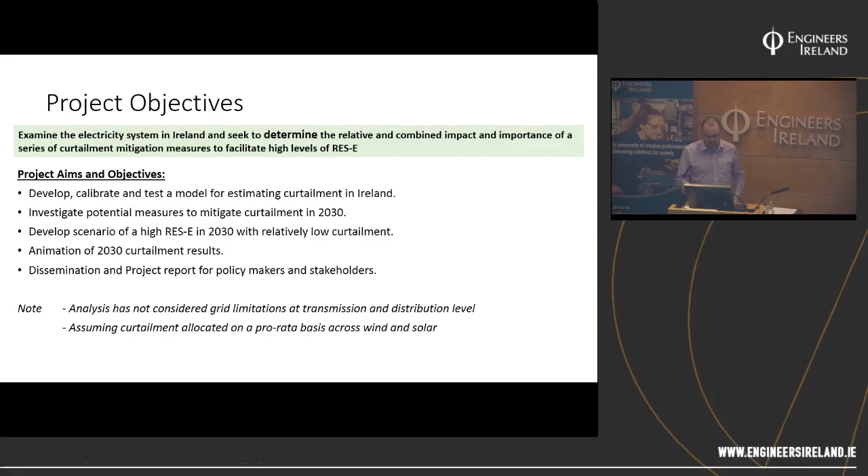And another point is that we are modeling curtailment here on a pro rata basis, which basically means that when there's a surplus of renewables on the system that the system can't take, we're allocating that burden equally among the generators. There is something in the clean energy package that needs to be looked at the moment around priority dispatch and the loss of priority dispatch for new generators. And with what I would say would be the wrong interpretation of that, or at least not a very helpful one, there would be a risk that the burden of curtailment could all be put on new generators, and that could have a material impact on what we're trying to do here. So just to call out those two assumptions before we get into it.

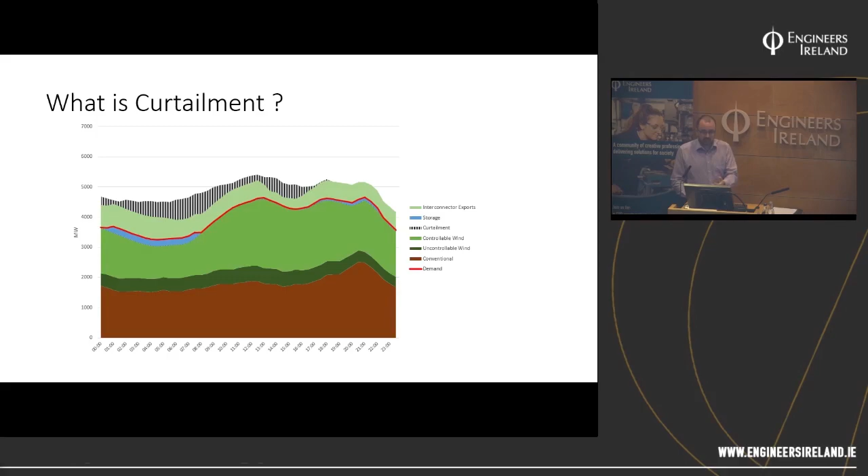So what we've done for this study is we're taking what's actually a very complex series of operational constraints that EirGrid have to employ when they're dispatching the power system, and we simplify it down to a parameter called minimum generation. And so if you look at that graph, the minimum generation level there is roughly where it's at today. Now there's another parameter that I'm just going to come on to. So that's an aggregate of all the different operational constraints.

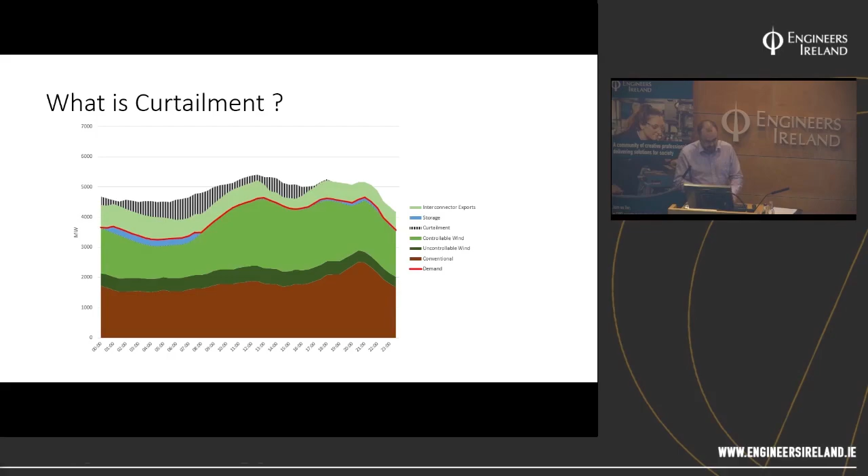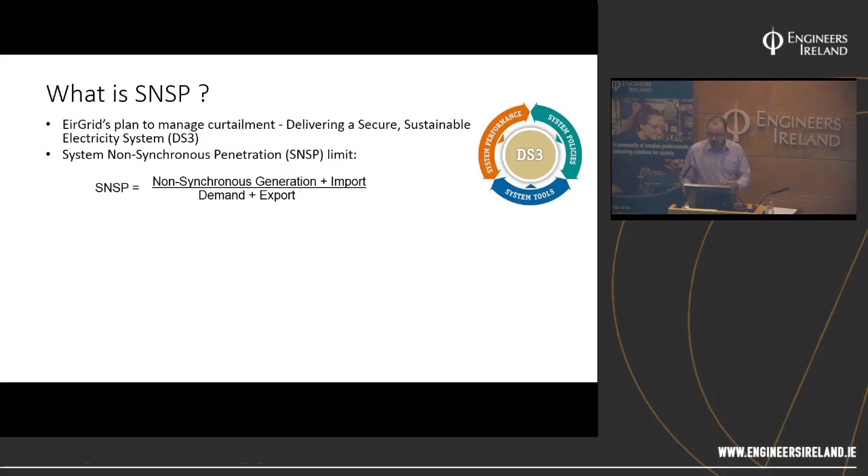When we talk about this issue, a parameter that comes up a lot that people may have heard of is the system non-synchronous penetration limit. So that's effectively non-synchronous generation plus interconnector imports divided by demand plus exports. And in real layman's terms, for our purposes in the Irish market, you can almost read that to be wind generation divided by demand and interconnector exports, because you tend not to be importing, or at least you shouldn't be importing at times when you have a lot of wind on the system. So that's a parameter that EirGrid has a constraint on.

So in the original facilitation of renewable studies that were done in advance of putting the DS3 program together, again, that people may be familiar with, they identified that the system could operate relatively safely at a 50% penetration level, but to go to 75%, they needed to do quite a bit of work to facilitate that level of penetration. And for a grid of our size and our reliability, that is world leading stuff. It's really cutting edge work that EirGrid have been doing on that.

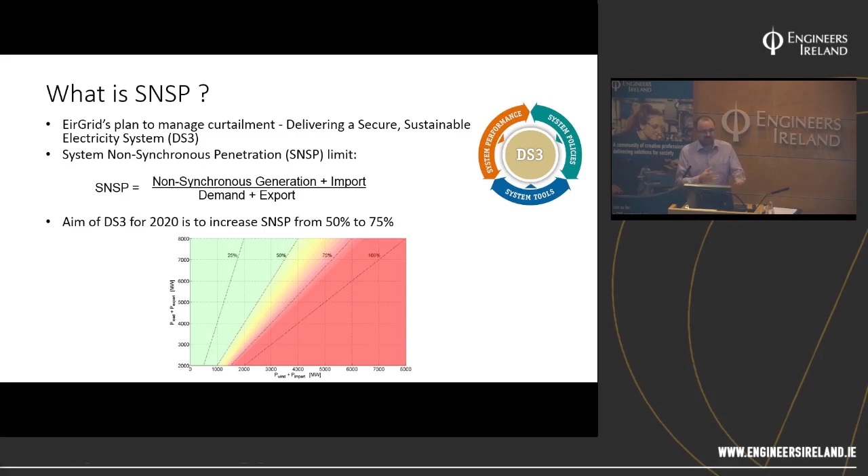And the DS3 program was effectively the program they put in place to allow the system to go from 50% penetration to 75% penetration by 2020. I think today we're at 65. I believe we might be trialing 70 by the end of the year. And as I say, even at that, that's already world leading stuff. And there's many countries around the world looking to the work EirGrid are doing to understand what's possible in this space. But what I would say is that is one operational constraint. There's a whole bunch of other ones. And when you aggregate them together, the end result is there's a big stack of conventional generation that's almost in the way of renewables, that you can't fit more renewables on the system.

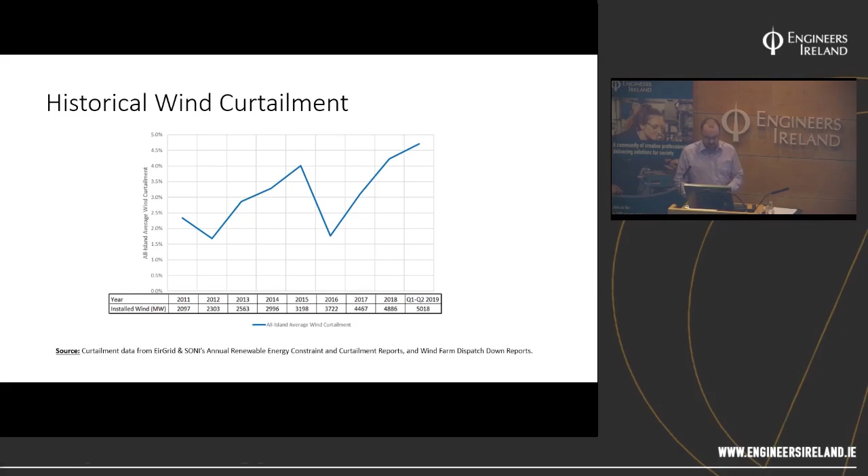But I would say again, if it wasn't for some of the really unbelievable work EirGrid have been doing in this space, if we were still at a 50% SNSP level and at the minimum generation levels that we would have had a number of years ago, that would be a lot higher. You could be looking at 10–15% of the power being wasted. So there's a lot of good stuff happening in that space. Industry will always want more, it's in our nature. But every now and again, you have to just acknowledge and take a step back and look at what they've been doing, and it's impressive stuff.

I'll just briefly cover the policy context because it is important. So if you think to how did we get to where we are today, and looking towards 2020, I suppose the Renewable Energy Directive in 2009 would have put a binding target on Ireland for renewable energy in total, and Ireland's response to that was to come up with this National Renewable Energy Action Plan.

Within that overall plan, it set individual targets for heat, transport, and electricity. But it was in that plan that the 40% target for renewable electricity emerged, and I think that was what gave the mandate to EirGrid, to ESB, to the regulators. It's that kind of policy target that gives all the other key stakeholders the mandate to do the work they need to do to get to these very, very high penetration levels.

The next generation, if you like, of that is the Clean Energy Package for all Europeans. So that's looking at an EU-wide target for renewable energy of 32%. And it's being worked a little differently in that the individual countries are being asked to come forward with how they can contribute to that target. So it's not a binding target on individual countries. And Ireland would have submitted its first draft of its NECP back in December 2018.

And I think in June this year, the European Union came back indicating that it wasn't ambitious enough. And I suppose since Minister Bruton has gotten into office, we've really seen a sea change, and the energy and ambition that he's brought to this issue has been fantastic for the industry, and what we're now seeing in the Climate Action Plan. And actually, with everything that's going on maybe in the UK, I think everyone loves criticising politicians.

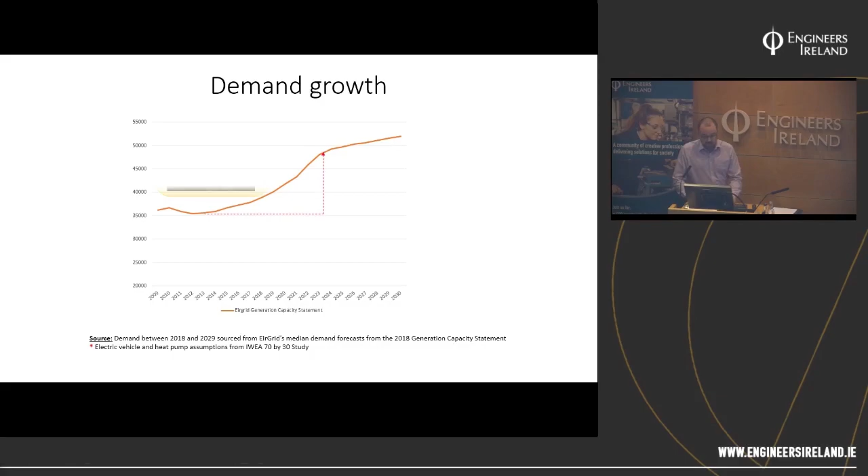Speak just briefly to demand growth. So this is the point I was making at the beginning, that the electricity sector is growing relatively rapidly, and it's primarily been driven by a huge growth in demand for data, particularly around Dublin. And so this graph here is looking from 2009, where demand has been, and looking at the EirGrid generation capacity statements and their demand forecasts out to 2030. And you are seeing this steep rise in demand up to 2025.

There's certainly a question mark as to what happens after 2025. I certainly don't think there's going to be less data. I think EirGrid are saying they can only forecast on what they can see. I think it's an open question. You do hear of technological developments in the data center sector in terms of the efficiency of the data centers, but there's certainly a question there as to will that growth actually really taper off at that level. I'll just leave that hang as an open question.

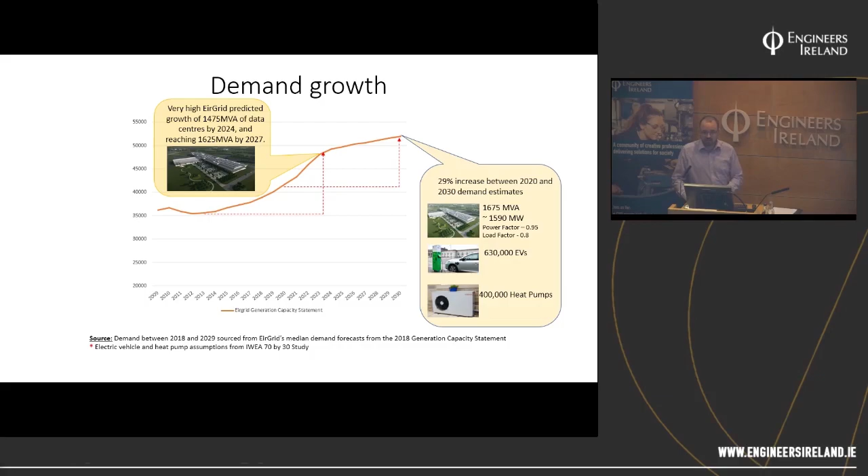And then obviously, we're seeing as part of the Climate Action Plan significant plans to increase electrification in the heat and transport sectors. But again, just to make the point, if you look at the actual numbers and where the growth is, I should say the figures we're using here for EVs and heat pumps, this study would have been carried out in advance of the Climate Action Plan, so they have grown a bit since this study was done. But even so, when you put them beside the data center demand, it's relatively modest in terms of its contribution.

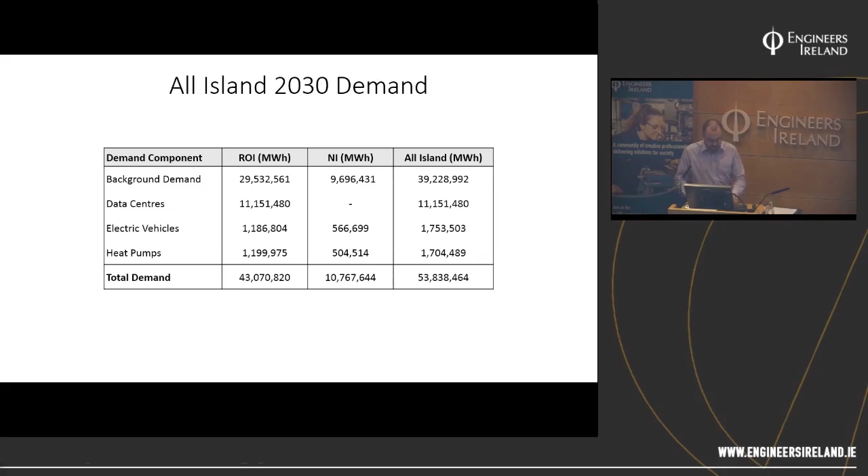Because we're looking at 2030 demand, with that higher demand figure, this is the all-island wind capacity that we expect to have installed. This is where RES-E would be with that higher demand. So we're taking 2030 demand, the 2020 system as a starting point. When I run this animation in a second, you'll see the wind capacity. We're just going to keep adding wind.

You'll see RES-E will keep going up, but you'll see this dial, which is effectively the percentage of all the available energy that gets wasted, rising as you keep adding wind and we're not doing anything else to mitigate the curtailment. So I'll just run that. And on the heat map, you'll see the different colors come up. In each individual hour, the darker the color, the more intense the curtailment is in that hour.

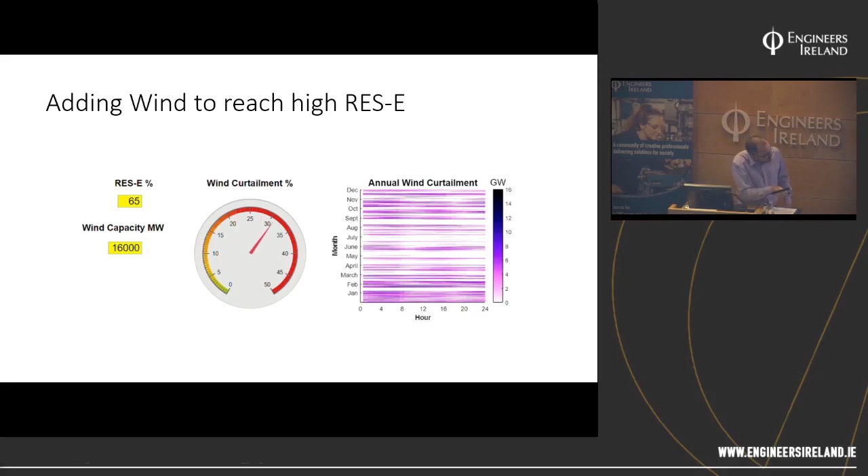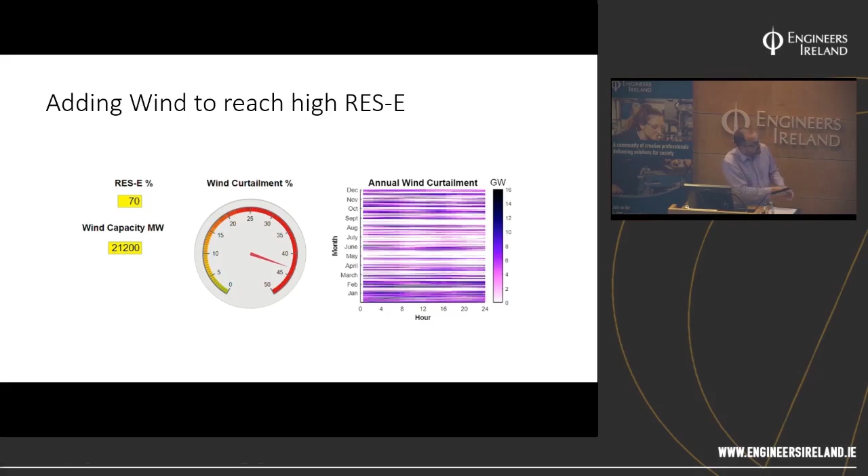As you run it on, you'll see that we can actually get to 70% RES-E just by adding wind, but it doesn't need too much explaining. Curtailment is getting close to 45%, and you can see that about 70-80% of the year there's some sort of curtailment happening. The events are very, very long duration. And that's a very important graph.

From an engineering perspective, I would call this defining the problem. There's huge amounts of energy there that you have to somehow manage. And when you think about the solutions that might actually help with that, just think about that. It's massive, massive amounts of energy that somehow need to be managed.

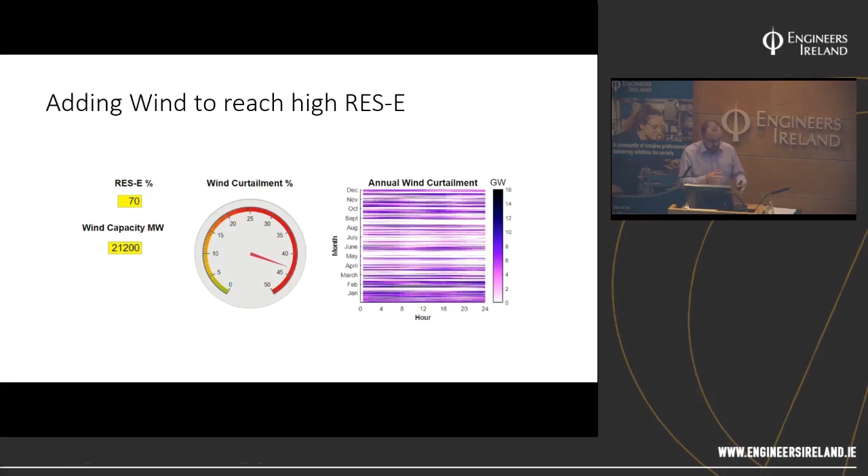So we did the same exercise with solar, just as a curiosity. We're starting here. I think there's about 300 megawatts of solar in Northern Ireland, and almost nothing in the Republic. This animation is a little bit slow, you'll have to bear with me. So we start adding solar, and we started from 35% RES-E, which was the 2020 wind. As we keep adding solar capacity, the RES-E starts going up.

But it's going up more slowly because solar in Ireland has a much lower capacity factor. So, you're adding an awful lot of solar to make a more modest contribution to the RES-E target, and that's purely capacity factor. And as you keep going, the nature of the solar curtailment problem is quite different. So it's not a long duration problem. It's an intensity problem. So because you're having to add so much capacity to knock a dent in the RES-E target, you end up with these very, very tall spikes of energy, and you still have these massive quantities of energy to try and move around or manage.

Now, just to test, is it even theoretically possible to get to 70%? And it's kind of obvious when you think about it that it isn't with solar, because you're only generating through a very limited number of hours in the day. So we went to silly figures with 50 gigawatts and you get to 56% RES-E. But curtailment kind of goes off the chart there. It's above 70%.

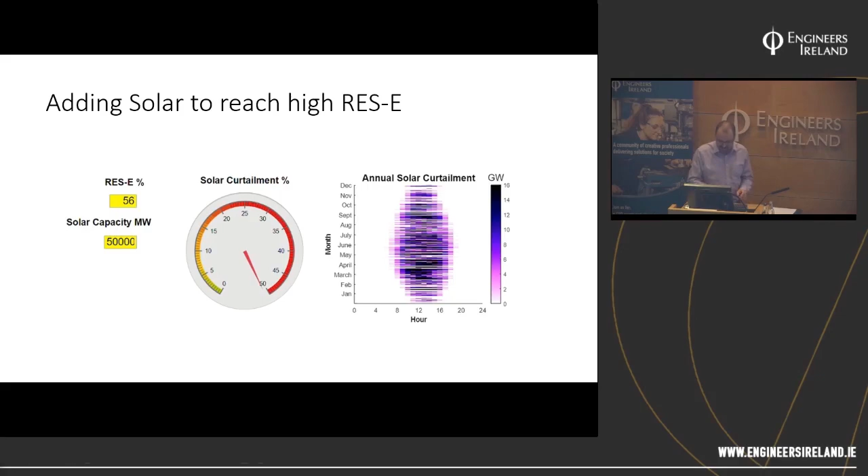Now, if there's any solar developers in the room, I do have some good stuff to say about solar later. So if the sniper rifles are out, you can put them back in the holster for a few minutes. I am going to say some good stuff later. Very good.

Okay, so that's defining the problem in terms of the curtailment challenge. So what we now look at is what are the different strategies that you can deploy to manage that curtailment and create space on the system for renewables. So we look at relieving these operational constraints. If you can find the technical solutions to these operational constraints to allow the system to run with much, much less conventional generation on it, how much space can you create? And then we look at interconnector capacity, storage technologies of different energy durations.

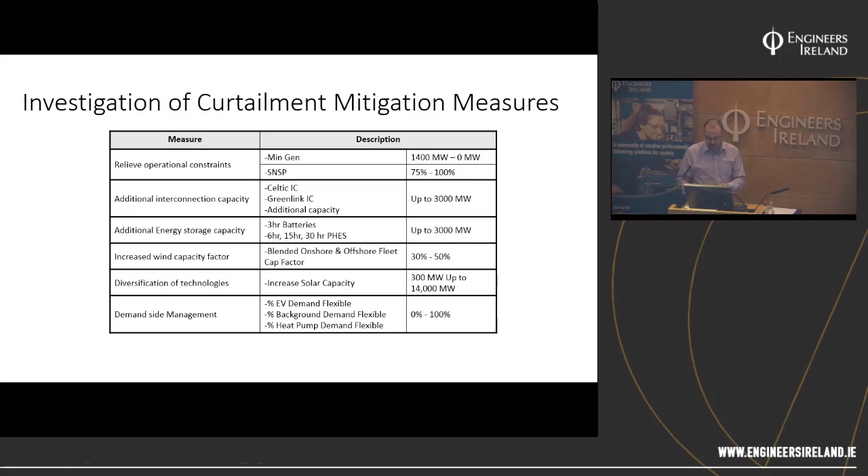A surprising one when we get to it was the wind capacity factor. So we looked at what's the impact of actually increasing the wind capacity factor, and that's effectively larger rotors without increasing the generators too much. I'll explain that in more detail in a minute, but it was quite a positive and surprising result we got on that. We then look at the diversification value of integrating a bit of solar into the mix, and we look at demand side management and what that can do.

So this is, if John O'Sullivan can see this, he'll probably shoot me, but this is the most unbelievably simplified version of the interactions between all the operational constraints and curtailment. The point we're trying to make here is there's a lot of focus on the SNSP, and this is something EirGrid would understand very well, there's a lot of focus on the instantaneous penetration of renewables on the system, but you hear less about the other operational constraints that cause conventional generation to run, or make it essential that that conventional generation runs.

So we first look at, and this is somewhat of a hypothetical exercise, because a lot of the things that you might do to facilitate a high SNSP limit by their nature would have the effect of reducing min-gen. So there is a complex engineering relationship between the solutions for SNSP and min-gen, but they're not directly linked. Some of the things that you would do to increase SNSP wouldn't necessarily get rid of the min-gen problem.

But you can see there, if you go to 100% SNSP as an individual constraint, there's a tiny improvement in curtailment. So we're starting here from this broken system with 45% of the energy being wasted, and we increase the SNSP limit to the point where that individual constraint is gone, but it doesn't do much while all the other constraints remain.

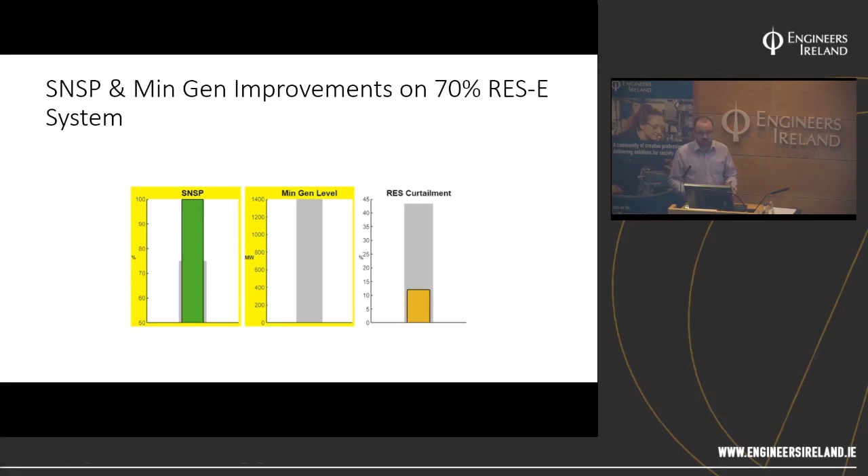And I think if you're at 100% SNSP, that's pointless if you're not fixing the other operational constraints and reducing the min-gen. So EirGrid are certainly thinking about getting somewhere, maybe not quite to here, but not very far away, and probably for 2040. This could be what you're looking at, a completely non-synchronous system.

Okay, so the next thing we looked at, again starting from the left-hand side of the graph with curtailment at 45%, the first technology we looked at was battery storage. Here we're looking at 3-hour batteries, so effectively they get full after 3 hours. And what you're finding is, because of that limited energy duration, when you have a curtailment event, the battery gets full very quickly, and once it's full, it sits there full for a very long time, waiting to find space to discharge before it can empty itself and be available to charge again.

So because of that energy limitation, what batteries can do for you on this kind of a system is not very much. And a bit like the solar, I have good stuff to say about batteries as well in a minute. So again, anyone who's developing batteries, please don't shoot me.

And then when you look to storage technologies that have greater energy capacity, so they don't get full as quick. If you take Turlough Hill, it has 6 hours of capacity, about 290 megawatts, I think. So with 6 hours of energy, you see more of an improvement. But to put that into context, Turlough Hill is say 290 megawatts, so round numbers 300. The right-hand side of that graph would be the equivalent of 10 Turlough Hills. So again, the energy limitation is not allowing you to create the space you need.

And it's the same story as you carry on. You can go to 15 hours, you can go to 30 hours. Obviously at 30 hours, you are seeing much more of an impact. But that's 10 Turlough Hills, with reservoirs 5 times bigger on 10 of them, to have that kind of an impact. So when you put that beside some of the alternative solutions to get you from 43, 44% to 20-ish, that's a pretty expensive solution if that's what you're using it for.

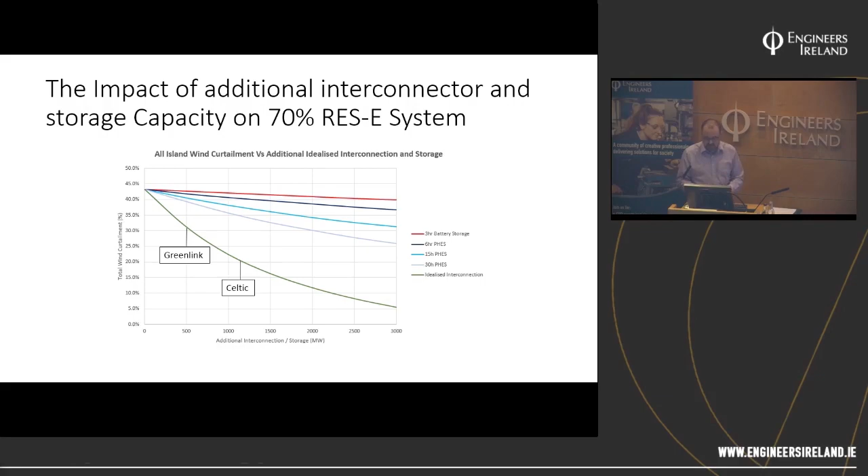So in terms of system services, some of the solutions to the operational constraint problems, batteries can do some of that. They can do fast frequency response, they can do reserves. So there's a bunch of system stability services that batteries can provide.

They can do ramping quite well, and something we haven't noted in this presentation, but something you do see as you increase the renewable penetration, you can get times when a weather system is passing over around 7 in the morning. So you've the generation from renewables starting to drop off just as demand is starting to ramp up. And that's effectively increasing the burden on the rest of the fleet to ramp up quickly and meet that short-term need. And that's something that batteries can do very, very well.

So in terms of security of supply, you could certainly look at batteries as an alternative to fossil fuel peaking plants. In the case of network investment, where there is a demand constraint, so it doesn't work particularly well if you have a constraint on the generation side. So let's say you have a wire that's full of wind energy, batteries isn't necessarily something that will create a lot of space on that wire. But in a situation where you're struggling to meet demand, batteries can be an alternative solution to building new wires, because that demand peak tends to be over a relatively short duration. So when the need is short, a short number of hours, batteries can play an important role there.

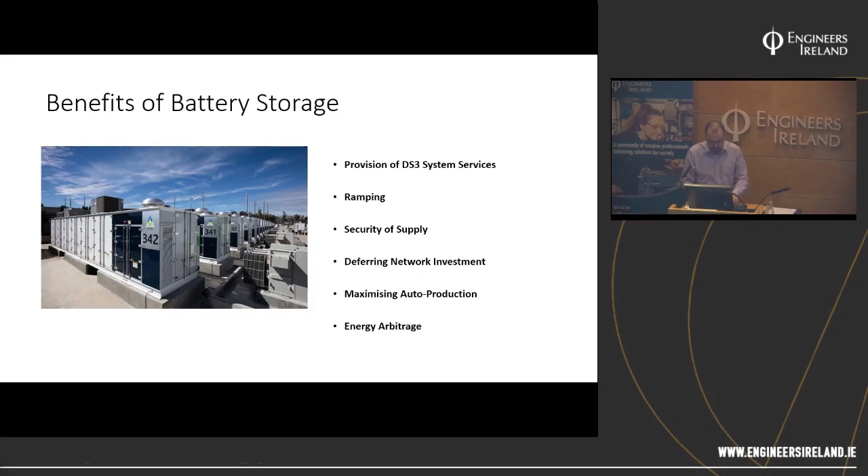We mentioned maximizing auto production and energy arbitrage. Energy arbitrage, there's a commercial aspect to that, which is making use of high pricing and low pricing in the market, and a commercial case. From a technical perspective, I would think of arbitrage as allowing the remaining conventional fleet to operate closer to its optimal efficiency levels. So you can imagine on these renewable systems, as you've lots and lots of wind on the system and it's ramping up and down, there's lots of balancing required, and that's causing conventional plants to have to move up and down a lot. And if you can smooth that burden on the conventionals to ramp up and down quickly, that improves the efficiency of the remaining conventional fleet as well, because we certainly do need conventional plant as well. So that's just a few words on what batteries can do.

The x-axis there at the bottom is a percentage of the electric vehicle demand that we allow to just move wherever the model needs it to mitigate curtailment. So we start off on the left-hand side, none of it is flexible. And over to the right-hand side, all of the electric vehicle demand is allowed to go anywhere at all that it needs to reduce curtailment. And that's what we got. The nature of the problem is, on a moderate renewable system, it's a completely different problem.

On a very, very high RES system, it just doesn't do what you might think it would. Now, the other point there, of course, is we are talking about a relatively small percentage of the total demand. So the two problems are, there's hardly anywhere to put it, and there's not very much of it if you're only looking at EVs. So on the later slides, we do look at flexibility coming from the broader demand base, if you like.

And then the second thing we did was we took the heat pumps that are on the system. I think it was about 500,000 heat pumps. We allowed that there were 500 litre cylinders behind all those. We let the temperature in those cylinders vary between 25 and 55 degrees, so a kind of 30-degree temperature differential in the cylinders. And so there was obviously a demand from the cylinders taking energy from them, and the model insisted that demand be met. So that was a kind of a constraint.

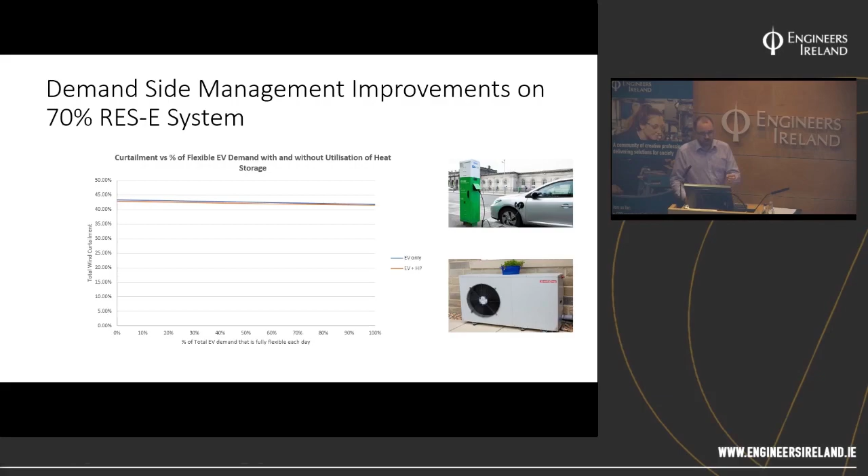Now, I know there's people who have done studies on integrating heat, and I think the story might potentially be quite different if you're looking at something like district heating, where you have a much, much larger energy reservoir. It's all about the energy. It's all about having a large enough energy reservoir.

Okay, this was quite an interesting one. So I'll let this come up, and I'll have to explain it because it catches a lot of people. It seems counterintuitive. What we're seeing here is the higher the capacity factor of the wind, which means the more production you get from the wind, the lower the curtailment. And the reason that seems counterintuitive is it kind of is. So what we've done here is every single point on that line represents a 70% RES system.

So as we put better producing turbines on the system, we're actually reducing the amount of installed capacity that you need. So the energy is going up, but the megawatts are coming down. The energy per turbine is going up, but the total installed capacity is coming down. And that has the effect of flattening the generation profile from the wind. And when you do that, it's taking energy off the peaks, putting more of it out on the shoulders. And we did expect this to have a benefit, but we didn't expect it to be quite as strong as it was.

So that's certainly telling a story that with modern turbine technologies going to larger rotors, higher tip heights, and certainly with offshore as well in the mix, if we can push the average capacity factor of the entire fleet up, you will see a very substantial system benefit.

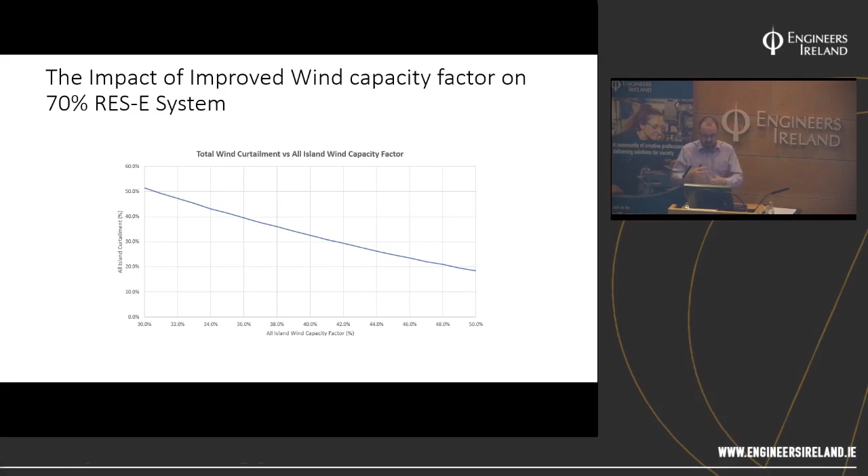And the analogy I've been using on this: in a former life, I would have been involved in construction, and in the housing boom, we built houses right up to 2007. I think it was around 2007, 2008, they brought in the insulation regulations and we stopped building houses. There's possibly a moment like this here where we're just about to start building a hell of a lot of wind, and if we can make sure that that is high capacity factor wind, and it's going to be on the system for 25, 30 years, you're making the challenge from 2030 to 2040 easier, because the nature of the fleet is just better. It naturally integrates better to the system.

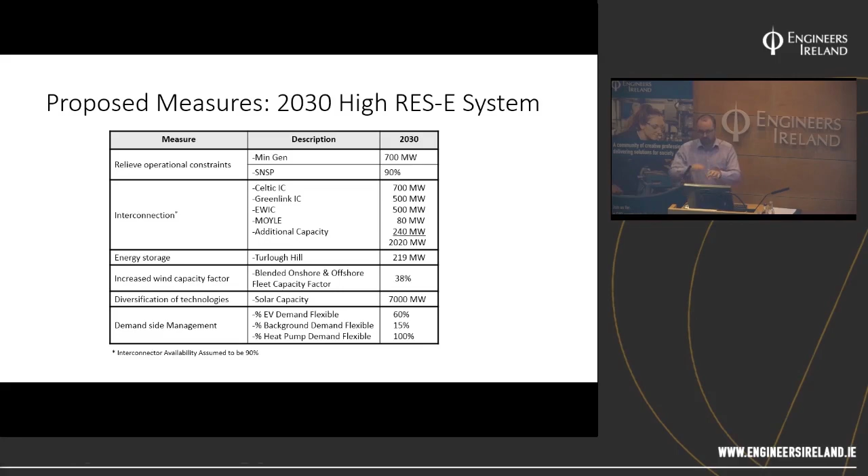Okay, so that was assessing the various different measures, and I will come back. I didn't specifically show the work package there on integrating solar, but it comes up in this next piece. So what we're doing in the next piece is implementing these measures one at a time, layering them one on top of the other, and seeing how high can we go.

So what you're looking at here is we're now kind of starting again from the bottom up, and we're saying to the model, don't let curtailment get higher than 5%. So as we implement a mitigation solution, it creates space on the system for more wind. We add that wind in the model up until curtailment hits 5, and then we stop. So each time we implement a mitigation solution, it creates space. RES-E goes up, but we limit it at that 5%.

And sorry, I've been playing with this model, and the animations have been kind of playing up with me, so I might have to implement a backup plan here in a minute, but the first few I think work okay.

So we're kind of starting here at 75% RESI or SNSP, about 1400 megawatts of minimum conventional generation. And because we started with high demand on the 2020 system, curtailment would have dropped off to 0. So the first thing we did was we added wind until we got to 5% curtailment again. So that took us up to that level. Hopefully this works. There we go.

So now we're moving up to this. These would have been the figures that we would have worked with EirGrid on, and that's allowing the SNSP level to get to 90%, and the minimum operating level of conventional generation can drop to 700. And as I say, EirGrid are now coming out saying that they're targeting here. So they're hoping to do more than what we have on this slide.

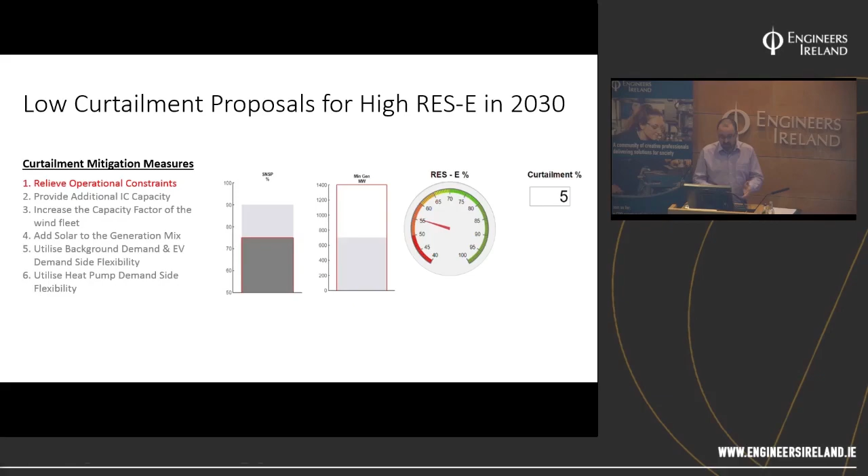And that one measure gets you to 55% RES-E, which would have been the government's original ambition, just with that one measure. Now I say just with that one measure, there's a lot of complex stuff that has to happen to deliver that, but in Ireland, we have some of the best power systems engineers anywhere in the world. They have a track record of delivering on this in the past, and I certainly have faith that they will do it again in the future.

So the next thing we looked at was interconnector capacity, but to address the problem of modelling it in an idealised fashion, when we're adding capacity here, we're actually modelling 90% of that. So we're allowing that if you build 1,000 megawatts of interconnectors, on average 900 megawatts of that is exporting when you wanted to reduce curtailment. And again, hopefully this works. I'll give it a second. There we go.

Okay. That's not working very well. I might have to implement the backup plan here, but what you find in this result is when you add the Greenlink interconnector, the Celtic interconnector, and relieve some of the existing constraints on the Moyle interconnector, that measure gets you up to 70%.

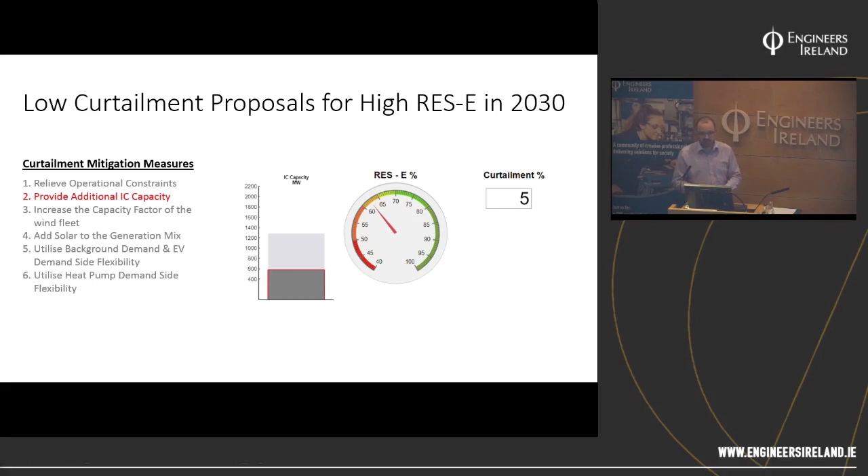And I'm just going to step out of this presentation for a minute because I have a feeling these animations are going to play up, and I'll just skip straight to the numbers. If you're all engineers in the room, I hope you don't mind numbers.

So what's happening here is this is adding. We're starting here with EWIC, and Moyle is currently, I think, restricted to 80 megawatts, and this is what we're modelling, the 522 megawatts of export capacity. And you can see that as you add the interconnectors, you can add more wind, and you're keeping the wind curtailment and the total renewable curtailment below the 5% level, and that gets you to this 68.5% RES-E again with just that measure.

And then the next measure we implemented was to start increasing the wind capacity factors. Again, we started on an assumption of 35% in 2030 because, just by normal development, moving to new technologies, there will be an improvement in capacity factors. But we're saying, maybe with some policy incentives, you can push that up a little bit further. And so if you could achieve across the fleet a 38% capacity factor,

you'll see here actually that the installed capacity of wind is reducing. So instead of 12.2 gigawatts at 35%, you can actually drop that to 11.8 at 38%, and the RES-E is taking a jump up there. It's going from close to 70 up to 73.5.

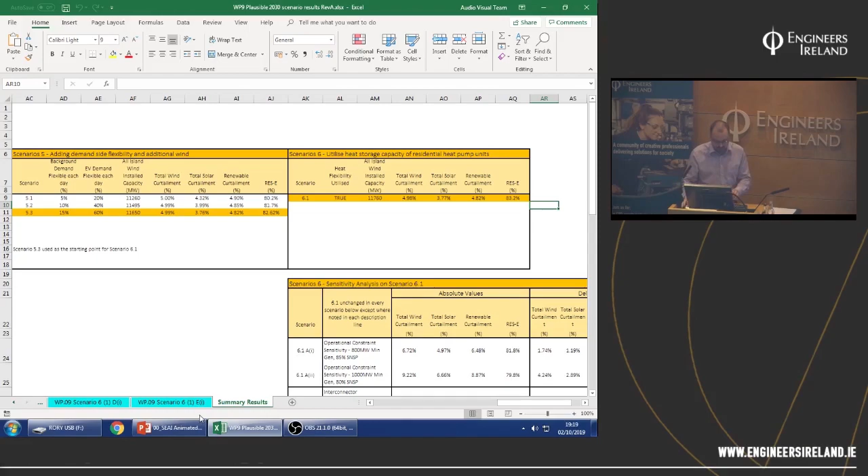And then the final step was to make those heat cylinders flexible again, and that takes you up to 83. So that was where we got to. Now, obviously, that's a scenario where pretty much everything is going your way. It's everything going exactly as you would like it to go.

I'll just go back to the slide deck here now. Sorry, try again. Sorry, I'm not sure what's going on there.

Yeah, so that wraps up where we got to with that piece of the work. There is a follow-on section where we're looking at 2040, at 100% RES-E scenarios, exploring hydrogen, and that'll be in the final report on the project. But for the 2030 dissemination, that's where we got to. To wrap up on recommendations, what's clearly coming through the results is the importance of the work EirGrid are doing on DS3 to relieve the operational constraints to achieve the ambition they've set out on 95% SNSP. That is a massive technical challenge, a moonshot project for Ireland, but we do have the right people to take that on, and I certainly have faith that they will achieve it.

There's the clean energy package rules. I think this priority dispatch question is an important issue. It needs an appropriate interpretation if it's not going to cause us a lot of trouble. New interconnectors are definitely needed, and just today there was an announcement that the Celtic interconnector has been awarded the 500 million funding from the European Union. I think market design is an important point. This is not something we've studied, but we're highlighting that the interconnector flows and how they behave is important, and there's potential for market design to either make those perform better for renewables or worse.